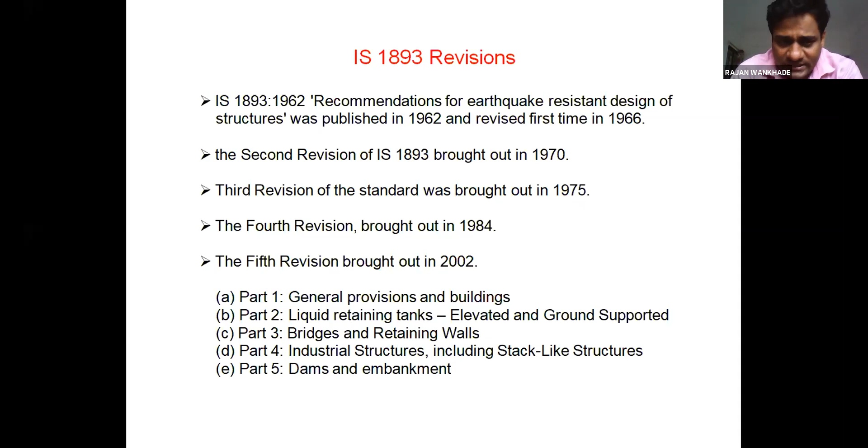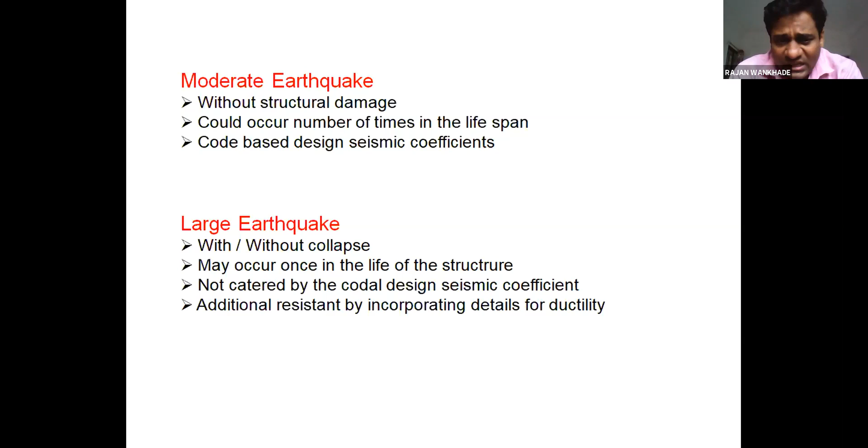But if it is a large earthquake, it can lead to, with or without collapse, major damage to the structure, and this can occur once in the lifetime of the structure, like the Bhuj earthquake and Killari earthquake. Those are examples of large earthquakes.

When we design buildings, we generally go for structures with a simpler plan, and this simpler plan performs better. But if we have an irregular type of building, there is geometric irregularity, stiffness irregularity, mass irregularity, and vertical irregularity. These are different types of irregularity. If we have an irregular structure with these different types of irregularity, it cannot perform better during the seismic occurrence of an earthquake, hence we generally go for the simpler plan for better performance.

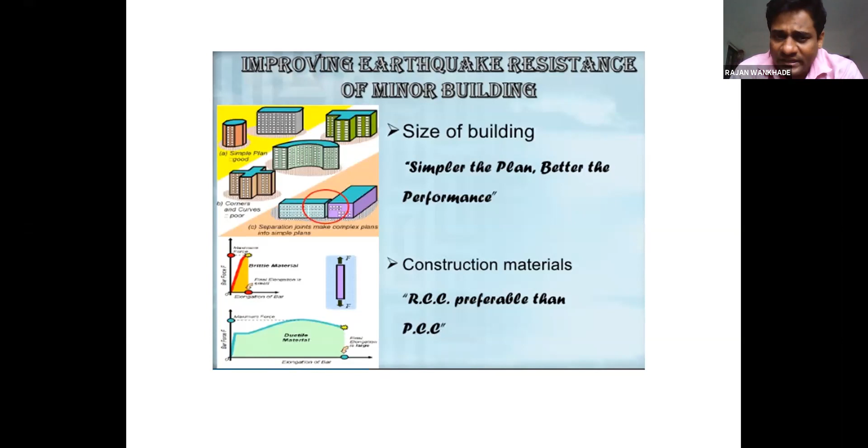We have construction materials, as I told, RCC and PCC. In RCC, we use structural steel as the ductile material, and this ductile material shall be given specific guidelines for designing of the reinforcement in ductile detailing.

We go for strong column and weak beam, because if the beams are weak but the column is strong, the column takes the load, and the joint should be sufficient to take the horizontal seismic load. That is the main approach of the strong column weak beam theory.

Horizontal bands and lintels are to be provided at doors and windows. If these are not provided, this can lead to damage during an earthquake, and the best example of this is the Latur earthquake incident.

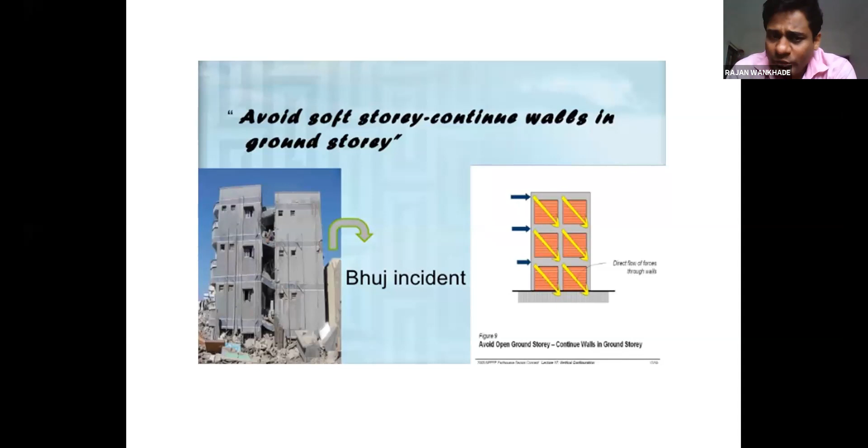The Bhuj earthquake of 2001 also showed us the presence of soft story and weak story conditions. There are specific definitions given for soft story and weak story, and due to their availability, buildings become unstable because they have less stiffness. Hence the IS code gives provisions for soft story and weak story to ensure higher stiffness. So improving the stiffness of this weak story is one approach.

Shear walls can also be provided. The shear wall and its positioning can lead to improving the stiffness of the structure in the lateral dimension.

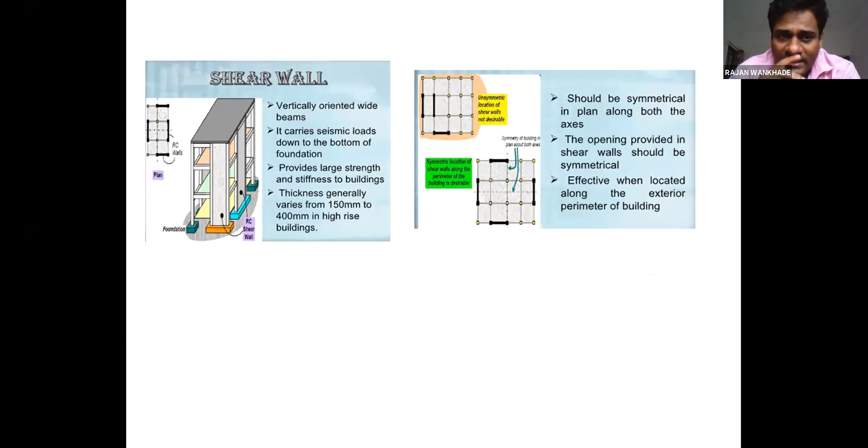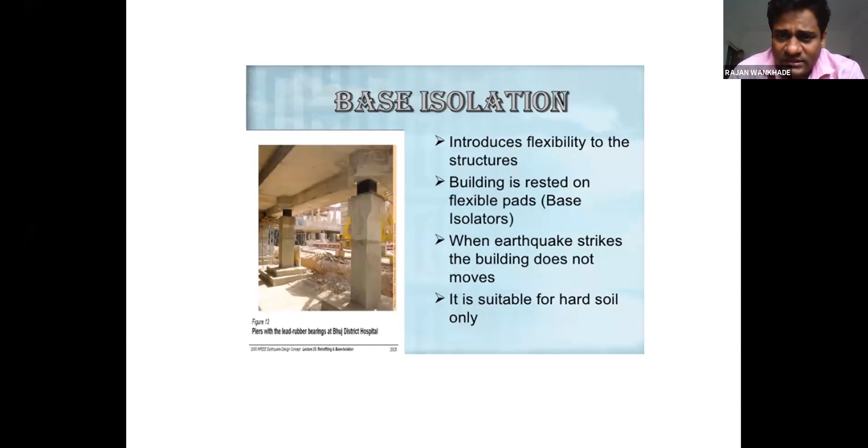Base isolation is one of the techniques used to absorb shocks due to horizontal motion of the structure. Ground vibration is counterbalanced by the base isolation.

We can also use dampers. Different dampers exist: tuned mass dampers, viscoelastic dampers, friction dampers, yielding dampers. These dampers can be made of steel, lead, or rubber bearing. There are various types of dampers, and they act as shock absorbers. If there is horizontal shaking, the joint movements and joint forces can be absorbed by these dampers. If the damper fails, we don't lose much, but if the structure fails, we can have loss of humanity and loss of structures. So we provide this type of damper. When an earthquake occurs, these dampers—for example, if we are using a lead damper—break and absorb the shock vibrations.

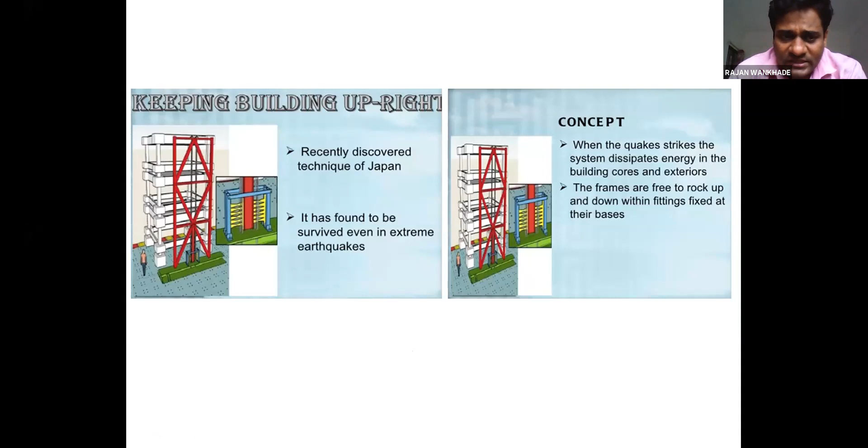An upright system is also one of the systems which keeps the building upright. It also acts as a shock absorber, dissipating energy, and hence this system is used in various techniques as a shock absorber.

Now we design the member as a flexural member or shear member. The member which takes flexural forces, that is bending moment, is called a flexural member. In general design practice, our beam is the flexural member because the beam is designed for bending.

If it is a cantilever beam, the bending moment or fixed end moment occurs at the support. If it is a simply supported beam, higher bending moment occurs at the center. If it is a fixed or continuous beam, bending moments occur at the center of the span, and at the support there occur fixed end moments or support moments. For these moments we use IS 456-2000.

In IS 456-2000, the coefficients of bending moments are given, and from that we find the steel reinforcement and design the beam as a flexural member. We also design it for shear.

For designing the flexural member, that is the beam, we have specific criteria for width and depth of the beam. We generally don't go for less than 200 mm width of the beam. We generally provide 230 mm or 300 mm. In some cases only 300 mm width is specified, like for water tanks and similar structures.

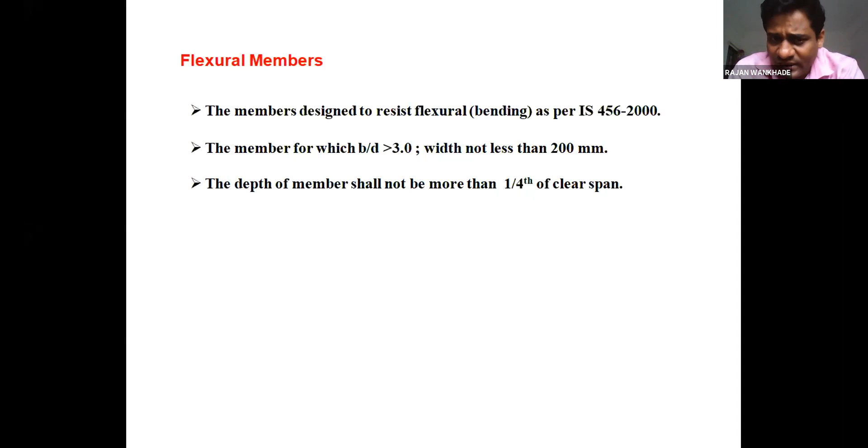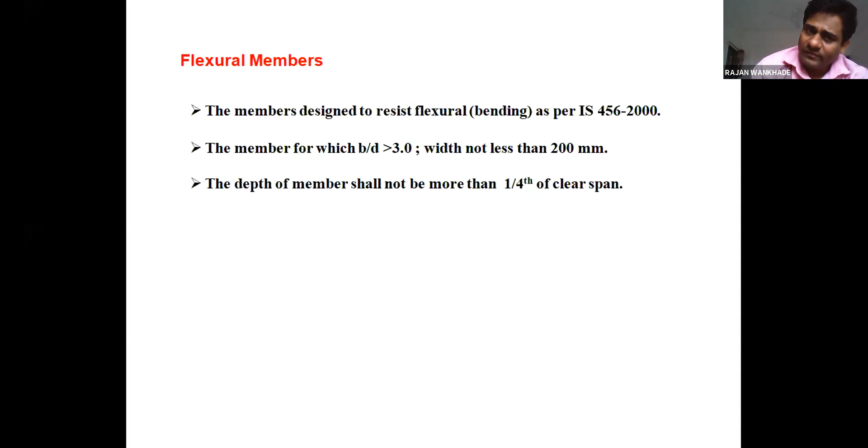Now the depth of the beam is restricted by the criteria that B by D ratio should be greater than 3; that is the depth criteria. The depth criteria also depends on the diameter of the reinforcement to be used—that is also one of the criteria incorporated. The depth of the member shall not be more than 1/4 of the span, because it may lead to a deep beam. That is the difference for flexural members.

We have the longitudinal reinforcement. We can provide the main reinforcement and nominal steel, but the definition and arrangement of this main longitudinal reinforcement is governed by the IS code, and specific criteria should be followed for providing the reinforcement. A minimum of 2 bars and a maximum number of bars can be provided, arranged in layers also. We can provide bars in 2 or 3 layers if the depth of the beam is large, and the development length should be proper for this longitudinal reinforcement.

The top and bottom reinforcement shall be considered as at least 2 bars, since we cannot go for only 1 bar. We have a symmetric structure, and at the top also nominal 2 bars shall be provided.

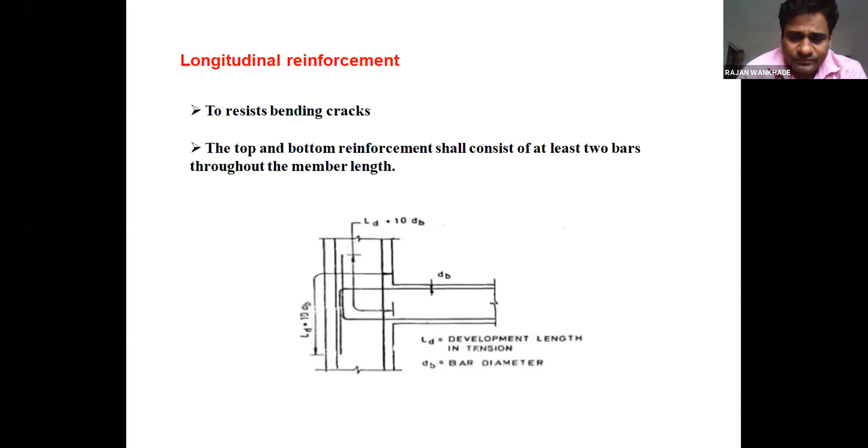Now for shear reinforcement, that is the transverse reinforcement, it is to be provided by specified criteria. The minimum spacing between the reinforcement shall be 100 mm, and that spacing should not be exceeded at the supports or at places where confinement of the reinforcement is required. This specific criteria is given in IS 13920, that the spacing between stirrups shall not exceed 100 mm.

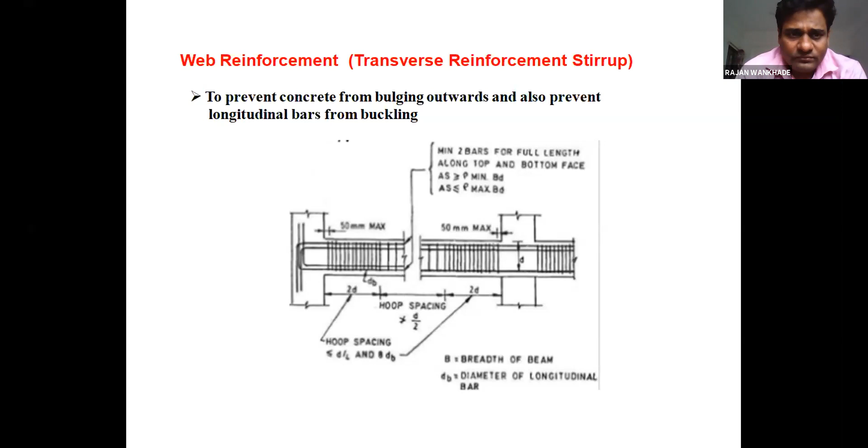For the column also, at the point of the junction, there is a beam and column junction. The confinement of the reinforcement shall be provided at the column and also at the junction of the beam, both places. This should not be greater than 100 mm. At the center of the column, the reinforcement should have confinement.

The stirrup shall be a 2-leg stirrup; 4-leg and different leg stirrups can be used as specified, or as given by the depth of the column. If the depth of the column is higher, greater depth, we can have this type of arrangement for the stirrups.

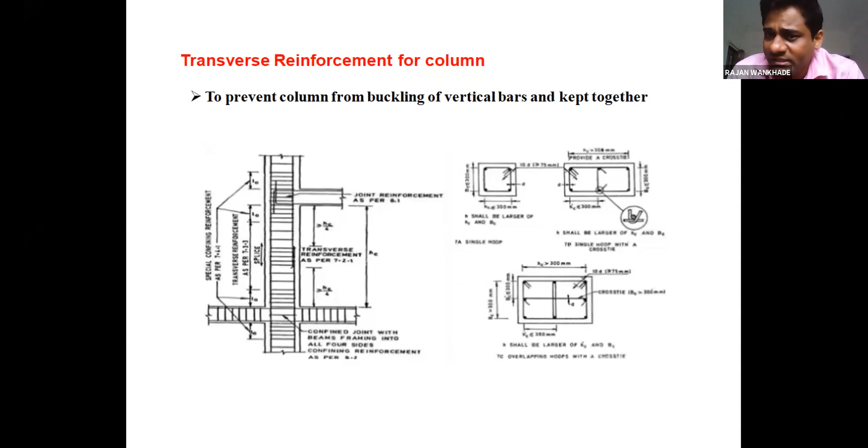Some important provisions are made in IS 1893 and IS 13920. When we have the beam width and beam depth, as per the latest IS code, if the diameter of the bar is given by dB, then we can go for 20 dB dimension of the column, or 300 mm. So minimum column width should be greater than or equal to 300 mm, or it should be 20 times the diameter of the main reinforcement. If the diameter of the main reinforcement is 20 mm, then 20 into 20 should be the column width. If the diameter of the bar is 25 mm, then 25 into 20, that is 500 mm, should be the dimension of the column. That is the criteria. As per IS 13920 also, bent up bars, inclined links and concrete RC should be governed by the specific criteria.

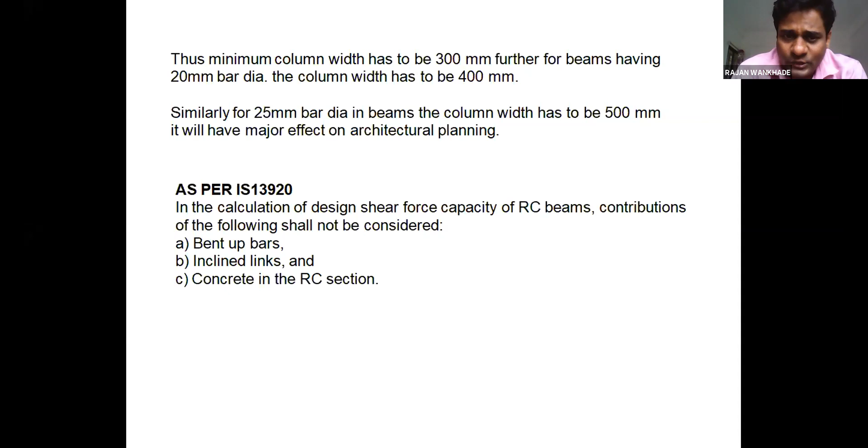Now, as per IS 1893:2016, these structures are designed as per the standards and are expected to sustain the damage. Smaller damage can be sustained by this, so that it can be recovered or we can repair the structure. The provisions of these standards are intended for earthquake resistant design of normal structures.

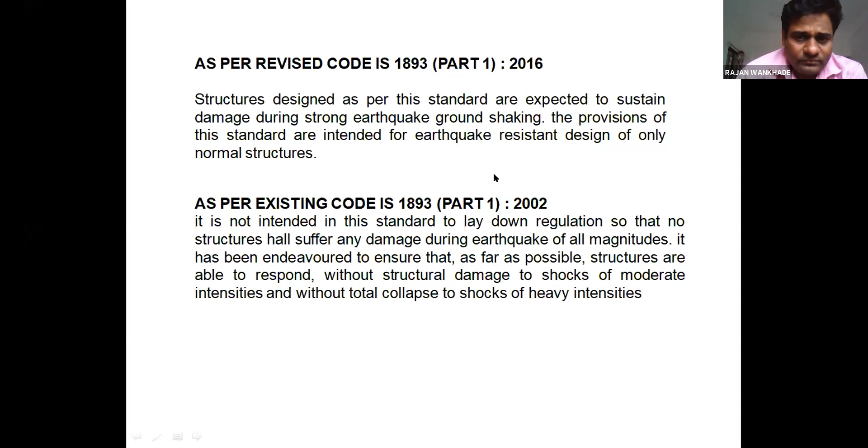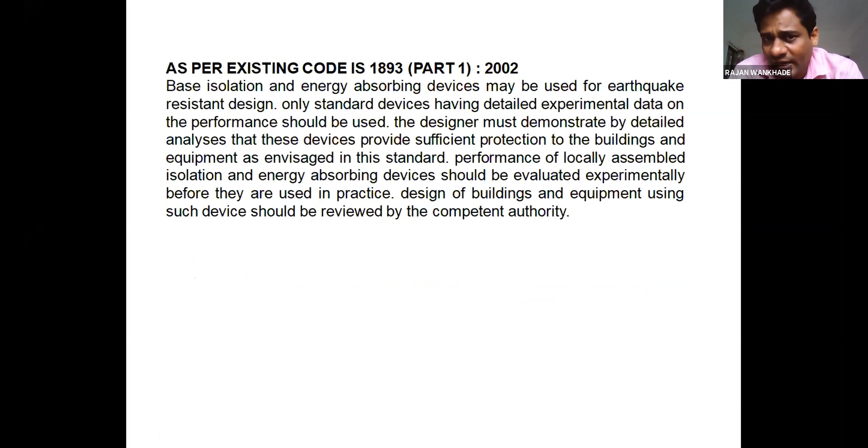Base isolation and energy absorbing devices may be used for earthquake resistant design, and we are not given the specific codal provision criteria, but in 2016 special importance is given to base isolation and energy absorbing devices, that is dampers and base isolation.

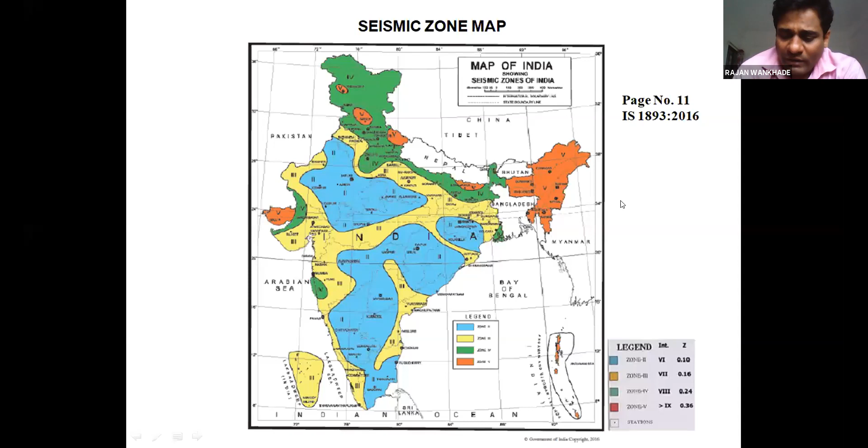Now this zone coefficient, that is Z, the value of Z as given in the IS code. Depending on these values of Z, we have the SA by G ratio, we have R, and we have I. From this we have the formula for the design horizontal seismic coefficient. What is the use of this design horizontal seismic coefficient? This formula is used to find the base shear.

Base shear and the horizontal forces at different levels of the building frames can be found from the total seismic weight of the building. Total seismic weight of the building can be found with the addition of the weight at each floor. If H is the height of the building, we can specify HI, that is the height at each level, H1, H2, H3, H4, H5, by the height of the building. AH multiplied with W will give the total seismic force, and from that we can find out VB static and VB dynamic.

VB static is the forces in the static case, and VB dynamic is the forces in the dynamic case. Now AH is given by Z by 2 into SA by G upon R upon I. Simplified, we can write Z by 2 into I by R into SA upon G. Here Z is the zone factor given by the IS code, 0.16, 0.24, likewise for different zones, and it is given by these zones, that is for Z. Now we have the SA by G ratio.

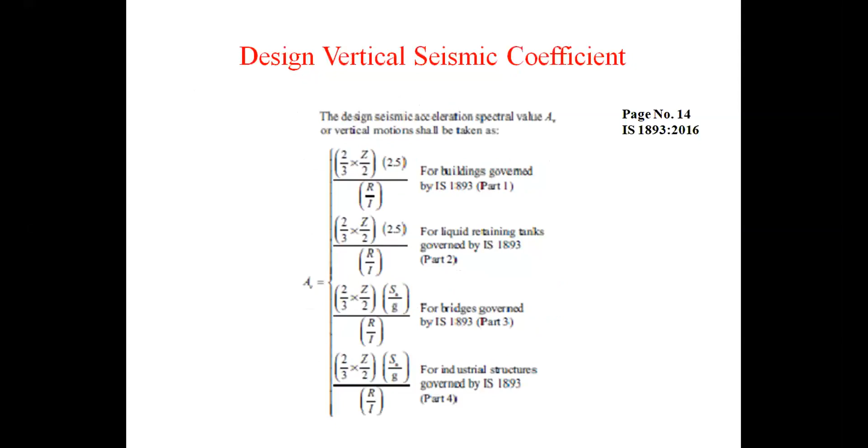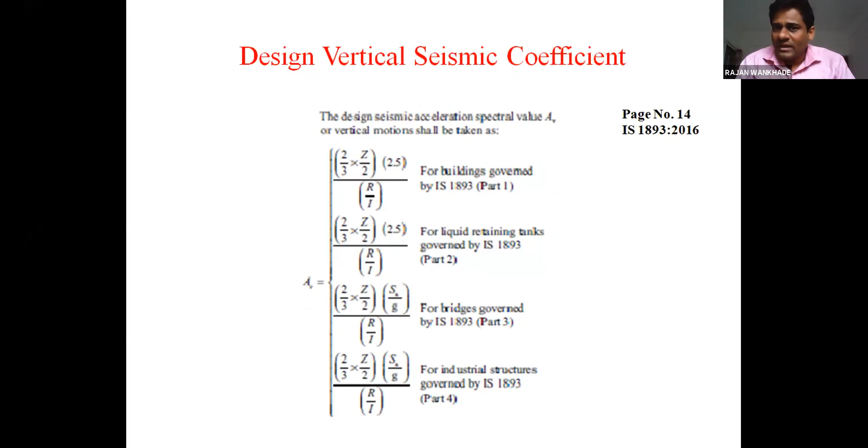In the previous IS code, vertical seismic coefficient was not given that importance, and hence in IS 2016, vertical seismic coefficient is also given as a specific formula, that is given by AV, A and V. V for the vertical seismic coefficient, given by 2 by 3 Z by 2 into 2.5 R upon I. So this formula which is given for horizontal seismic coefficient is slightly modified for the vertical coefficient, and this depends on the buildings, liquid retaining tanks, bridges, and industrial structures.

So if there is a liquid retaining tank, instead of using this formula, you will have to use this modified formula. That is for the vertical seismic coefficient.

SA by G ratio depends on the time period. If T lies between 0 to 0.4 second, if T is between 0.4 to 4 second, if T is greater than 4 second, and also the SA by G ratio depends on time as well as the soil condition.

If it is hard soil, rock soil, if it is medium soil, stiff soil, if it is soft soil, then your SA by G will be little different. And for vertical and horizontal seismic, you will have to find out the SA by G ratio from page number 9 of IS 1893-2016.

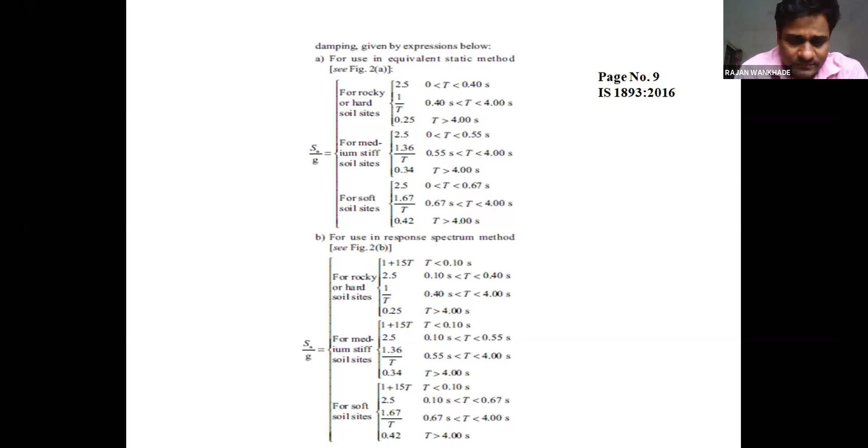Now, how to find out the time period? In the previous IS code, we were bound to use only one formula, to go for this formula.

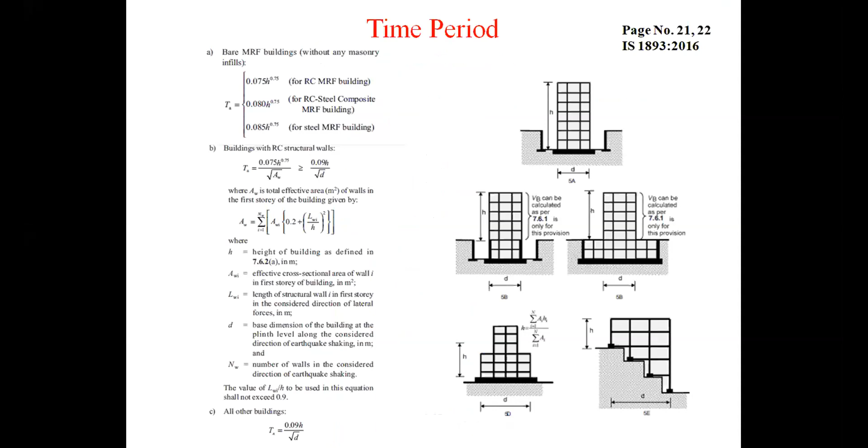TA equals to 0.075 h to the power 0.75 upon under AW, and that should be greater than or equal to 0.09 h upon under D. That is the basic formula. This TA is introduced in the latest IS code.

This is the incorporation of this formula, and this AW, that is the effective area of the shear wall, is given by this formula: summation i equals 1 to N, AWI into 0.2 plus LW upon H whole square, where H is the height of the building, AWI is the effective cross-sectional area of the wall, length, base dimension, and number of walls of the shear wall.

And if there is a bare moment resistant frame without shear wall, the formula becomes T equals 0.075 h to the power 0.75 for RC moment resistant frame.

If it is a steel composite frame, that formula will be replaced by T equals 0.080 h to the power 0.75. And if it is only a steel moment resistant building without any composite, the formula becomes 0.085 h to the power 0.75.

So this is the incorporation of this time period formula, and for different structures we can use different formulas for the TA. But the limit of this formula is it should not be less than 0.09 h upon under root D. That is the basic formula.

Now we have some irregularities of the building and how to take the base effective dimension, as given by these figures. If it is rectangular, D is the overall width of this structure, but if it has unsymmetric geometry, the base dimension is different from the top dimension, then D shall be the effective D. So this figure shows the effective D, which is taking part in the seismic forces.

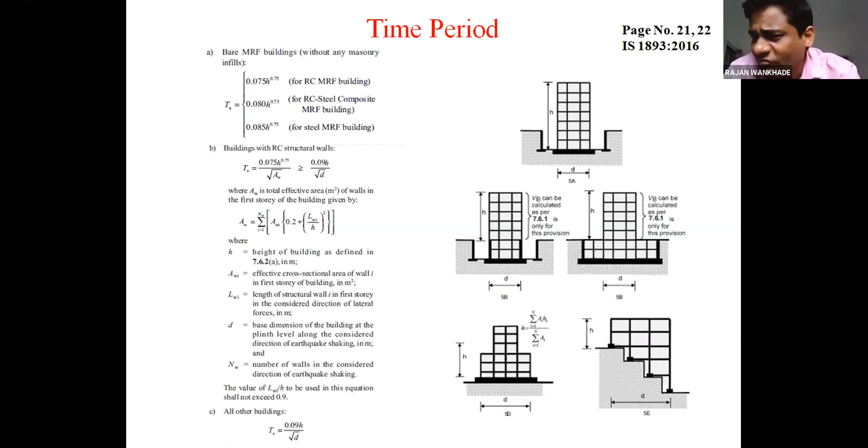If it is a set-back, step-type building vertical irregularity, then D, that dimension, will be from the first column to the last column.

So the figure shows some irregular types of buildings. The building can have plan irregularity, like T-shaped building, L-shaped building. These are examples of plan irregularity.

We have stiffness and mass irregularity. If the building is having a soft story, if it is having a weak story, or if it is having different stiffness at various levels, then this irregularity is termed as stiffness and mass irregularity. Some malls are examples of this. In some malls, the middle portion can be larger than the top and bottom portion, so it is termed as mass and stiffness irregularity because stiffness and mass are different at different levels. Some malls and specific hospitals are examples of this mass and stiffness irregularity.

We have vertical irregularity. Sloping ground is available in the Himalaya region, so in those cases, if houses are constructed on sloping ground, it will be termed as vertical irregularity.

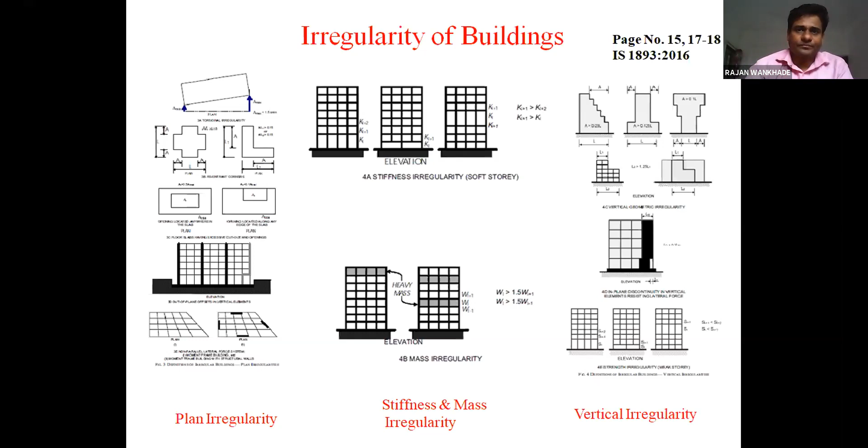Now we have the equivalent static analysis, and in equivalent static analysis we find QI. We have seen the formula for AH, that is Z by 2, I by R, Sa by G, and this AH is multiplied into VB, that is the design lateral force, given by VB equals AH into W. From this VB we find QI, the base shear, that is the lateral force. QI is termed as VB into WI HI square upon summation of WI HI square, where I represents the level.

For example, if it is a 4-story building, I will be 1, 2, 3, 4, that is level 1, level 2, level 3, level 4. The building should be designed for at least the minimum design lateral force as given by clause 7.2.2, and for this various percentages are given. If the building height is less than or equal to 120 meters, for different zones this factor should be 0.7, 1.1, 1.6, 2.4. So this is the limit for these factors.

So likewise VB static, we have VB dynamic. If we go for VB dynamic, the formula given by summation WHI upon summation WHI square is converted into PK, that is the modal participation factor, which becomes summation WI phi I upon summation WI phi I square, where phi represents the mode shape of the first mode, second mode, third mode, fourth mode, and so on. We consider those modes which have maximum contribution.

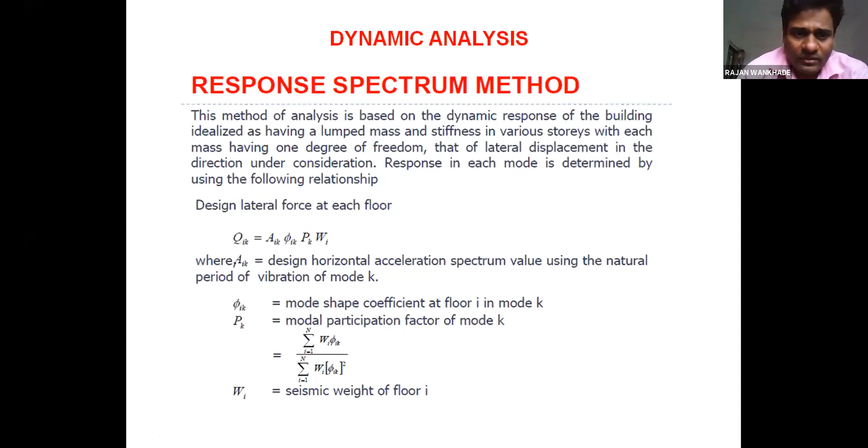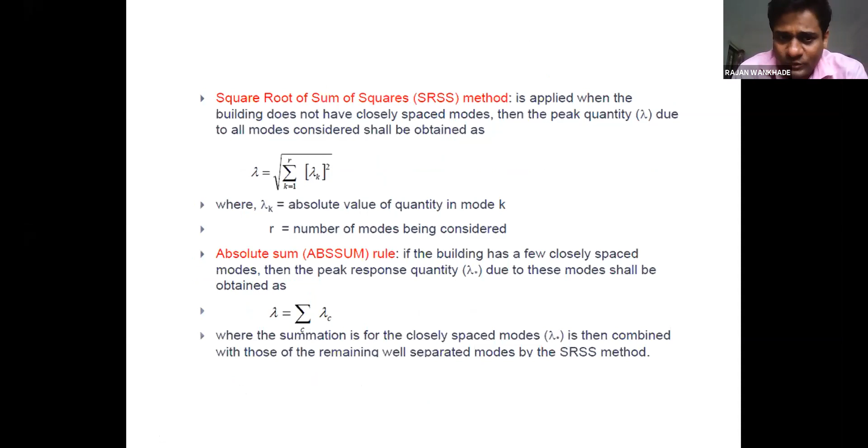Hence we have two methods, SRSS and ABSSUM method, for finding out the value of lambda. SRSS is the square root of sum of the squares method: lambda equals the square root of the sum of squares of lambda k for different modes.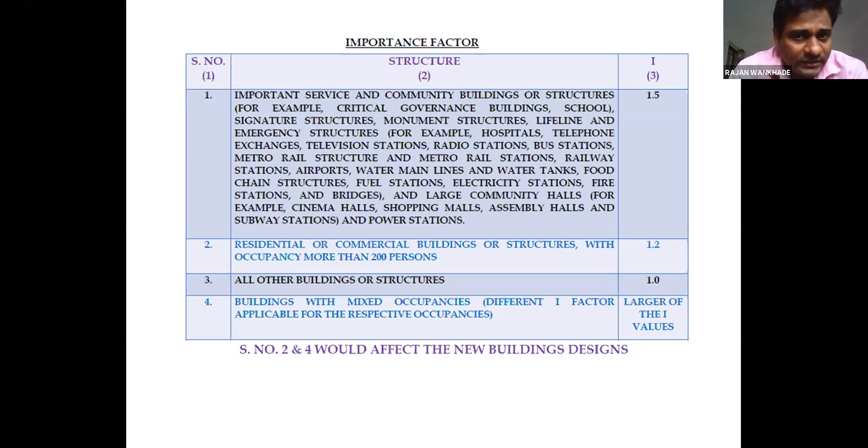Now, importance factor. Importance factors which were having only two values in the previous IS code, that is 1.5 and 1, are revised in IS 2016 as 1.5, 1.2, and 1, with the larger of these values used. Buildings that are important service community structures, like government buildings, schools, monument structures, have a higher importance factor of 1.5. Normal buildings, residential, commercial buildings that are not that important, but still have specified governance criteria and occupancy more than 200, use the 1.2 importance factor. In the previous IS code, instead of 1.2, it was only 1; now it is modified as 1.2. For all other normal regular buildings, we use the importance factor as 1.

So previously the IS code had the 1.5 and 1 criteria, which is modified in the 2016 IS code as 1.5, 1.2, 1. So these are the different values which are incorporated.

Now we have the response reduction factor. It is given by the stiffness criteria, and stiffness criteria depends on ordinary moment resisting frame, special moment resisting frame, composite frames, and frames having brick wall or infill wall. All this depends on stiffness, and hence for stiffness we have the response reduction factor. Response reduction factor for OMRF is 3, SMRF is 5. In addition, for buildings with ordinary RC structural walls, a factor of 3 is introduced, and 2.5 is introduced for structural wall systems. This is the addition of clause 7.2.6 in the new IS code.

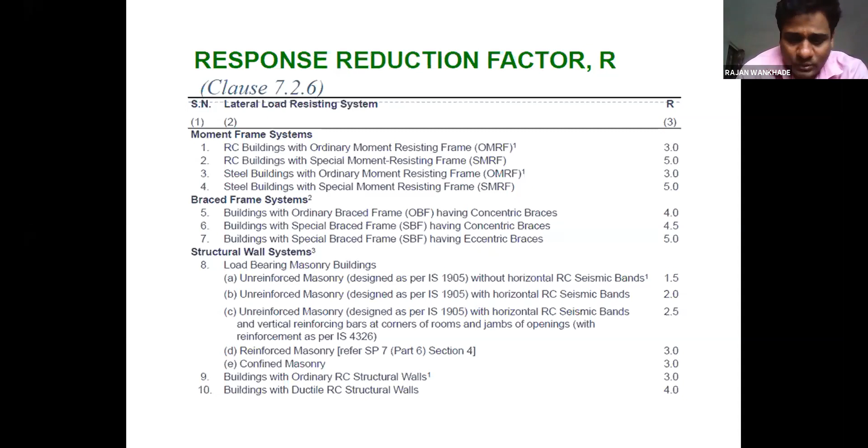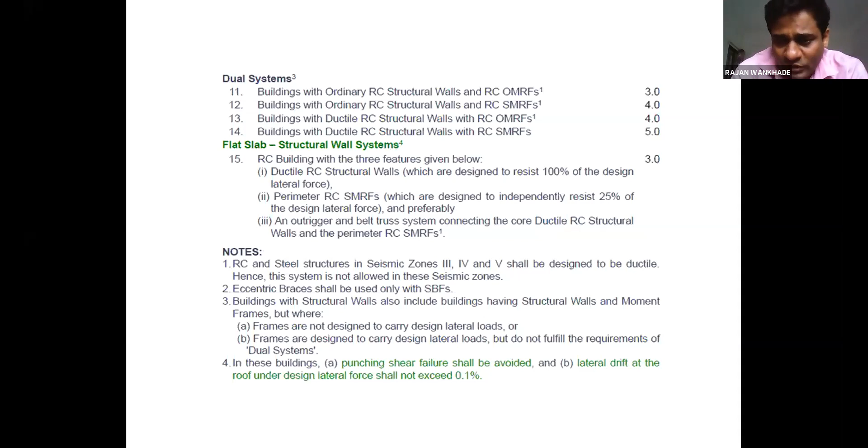Another new parameter is introduced: as per the previous IS code 1893:2002, the time period was 4 seconds, and it is now extended to 6 seconds. So the natural period, T, in seconds, is elongated to 6 seconds in the revised IS code. This is the spectra given for different types of soil: type 1, type 2, that is soft, medium, and rock.

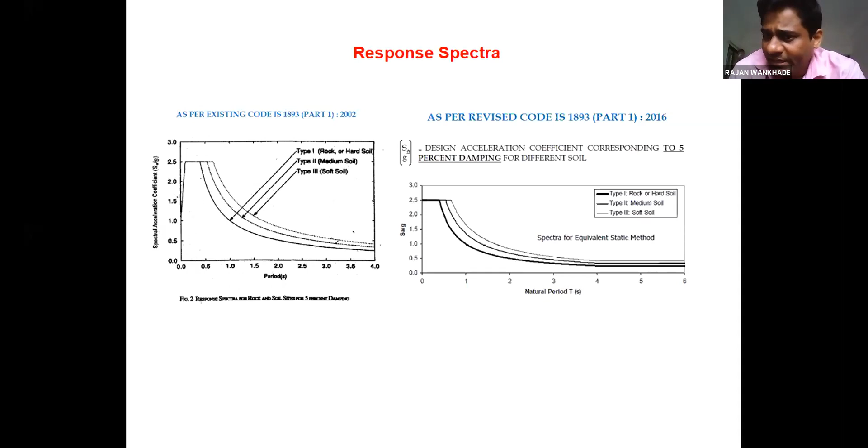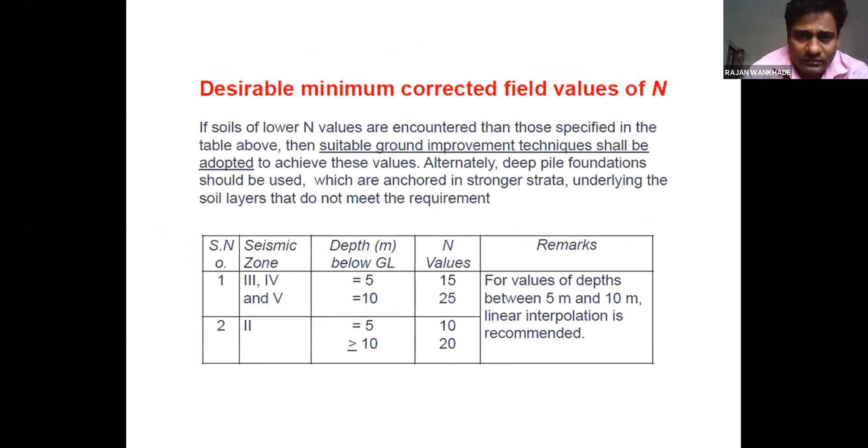Now, the percentage increase in allowable bearing capacity of the soil: if it is rock soil, you can increase the percentage allowable, that is 50%, 25%, and 0% for soft soil. So for soft soil, no percentage increase in bearing capacity or bearing pressure of the soil is allowed.

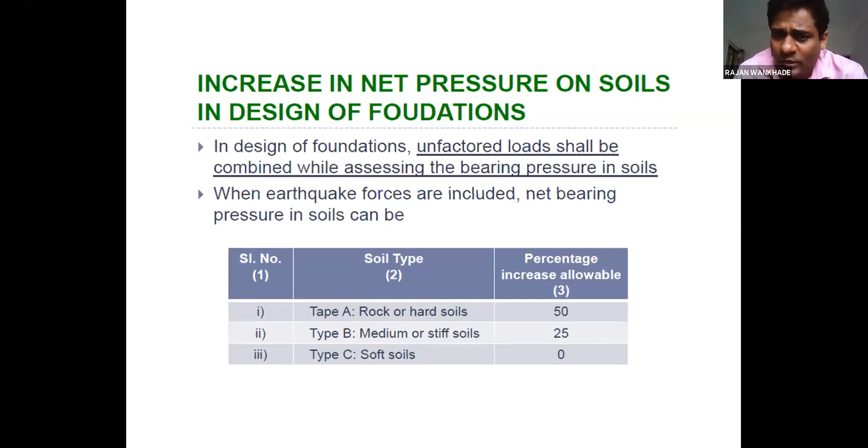Codal design philosophy: we need the ductile behavior of the structure, and ductile behavior can be obtained by having the specified confinement of reinforcement. We avoid the brittle behavior of the structure, hence the equivalent ductile behavior factor with equal elastic and inelastic deformation. So we want only elastic and inelastic deformation, but we don't want brittle failure.

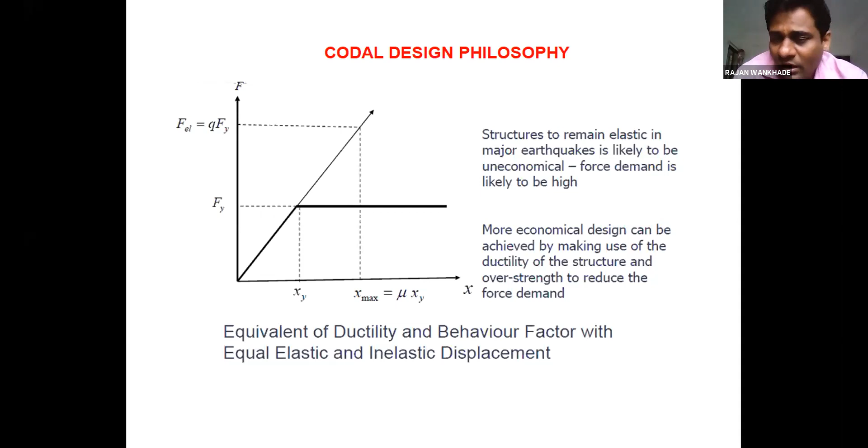Now we have different load combinations for earthquake resistant design. We take 1.5 times the dead load, 1.5 times the live load, and when we add the earthquake load, we take 1.2 times. So the load combination is 1.5 dead load plus live load, plus 1.2 times dead load, live load, and earthquake load.

These combinations are specified for the design horizontal earthquake loads, given as ELX plus or minus ELY. If earthquake is taken in the X direction, then in the second direction we take 0.3, that is 30%. If we take earthquake in the Y direction, then we take 30% in the X direction. So ELX plus or minus 0.3 ELY, or ELY plus or minus 0.3 ELX. If 0.3 is in the Y direction, the major direction is X; if 0.3 is in the X direction, the major direction is Y.

So for this we have these combinations: 1.5 dead load plus live load for normal loading, 1.2 times dead load plus live load plus or minus earthquake in the X direction, 1.2 dead load plus live load plus or minus earthquake in the Y direction, and 0.3 is added for the orthogonal direction.

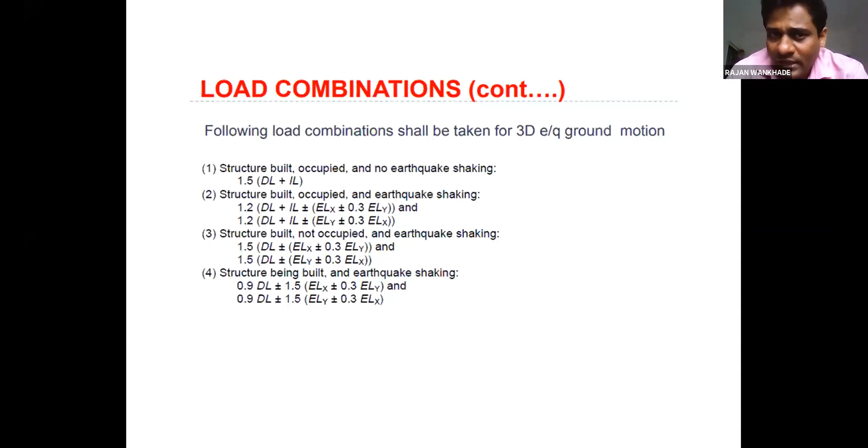And 1.5 dead load, live load, earthquake load, 0.9 dead load plus or minus 1.5 ELX in the major direction, and 0.9 dead load plus or minus 1.5 ELY in the major direction. These are the load combinations, and taking all combinations leads to an envelope of loads, from which we pick the maximum combination giving maximum force. For that maximum force we find the bending moment and shear force, and design the structure.

Now, likewise horizontal seismic coefficient and horizontal effect, we also consider the vertical effect. But there are some conditions for considering vertical effect. If it is a normal structure not in a highly earthquake prone region, we shall not go for vertical earthquake effects because it will not contribute much, and considering it would be uneconomical. So to avoid this uneconomical condition, we have guidelines for the vertical earthquake effect.

For considering vertical effects: if the structure is located in seismic zone 4 or 5, go for vertical earthquake effects; if located in zone 2 or 3, don't go for vertical effect. If the structure has vertical irregularity or plan irregularity, you can consider vertical earthquake effects. You should also consider the vertical earthquake effect if the structure is on soft soil, because it will lead to unequal settlement.

Why for bridges should we consider vertical effect? Because in a bridge, the span between the two columns is very large, and hence for such large span, unequal settlement can occur, and hence vertical earthquake effect shall be considered.

Structures having longer spans, for example bridges, overhang structural cantilevers, or subsystems, should consider vertical earthquake effect because this will create differential moments.

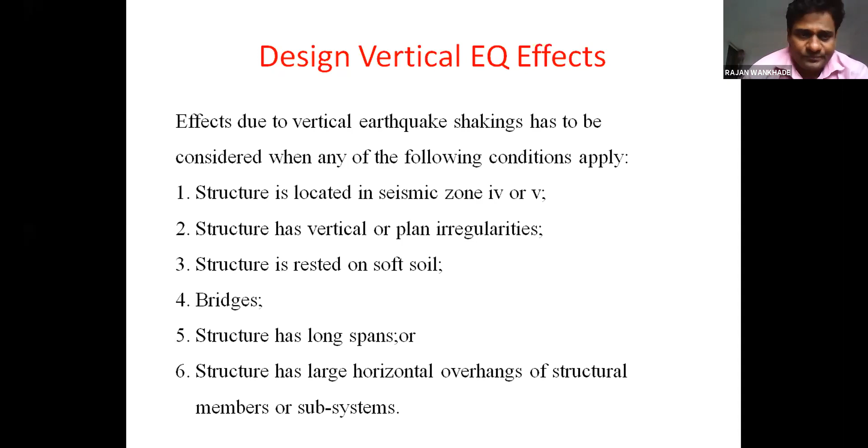Combination of these earthquake effects for 3D ground shaking can also be considered. For 3D ground shaking, we have ELX, ELY, and ELZ. If major direction is taken as ELX, that is X direction, 0.3 plus 0.3 means 30% is Y direction and 30% is Z direction shall be considered. If major direction is Y, then 30% is Z and 30% is X. If the major direction is Z, then X and Y directions shall take 30% of the earthquake force.

Other combinations are given in terms of 1.2 dead load, IL meaning imposed load, and ELX, ELY, ELZ - these are the different combinations. Likewise, 1.2 times, 1.5 times, and 0.9 times - these are the different load combinations.

Now equivalent 3D load shall be taken as under root of ELX square plus ELY square plus ELZ square. That is the root of this addition.

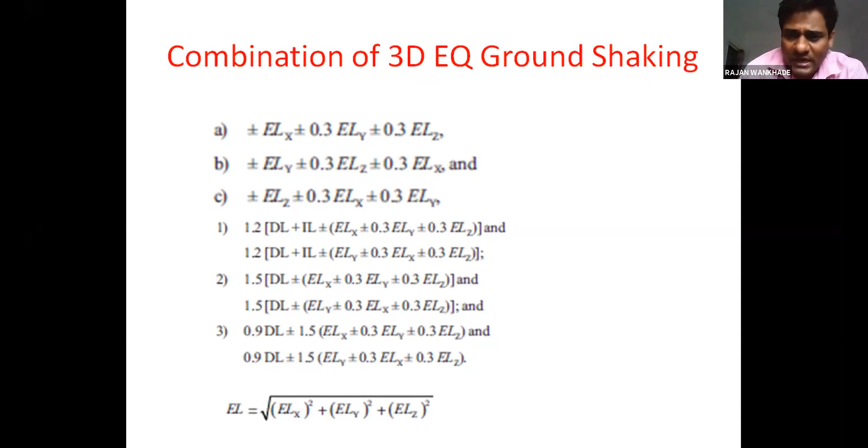Section properties have specific criteria. In RC and masonry structures, 70% of I gross is taken. Now how to calculate I gross? If it is rectangular, I section, or channel section, that is the logic for this. For column, 70%, and for beam, 35% of the I gross shall be taken. These are the stiffness criteria.

Soil interaction is related to the foundation, and for foundation we have different soil types, and this classification of soil - type A, type B, type C - depends on the value of N, that is the corrected value of N for different zones.

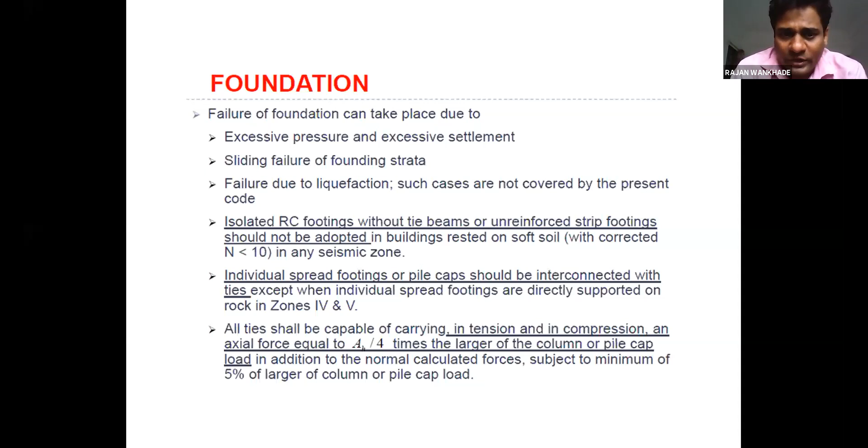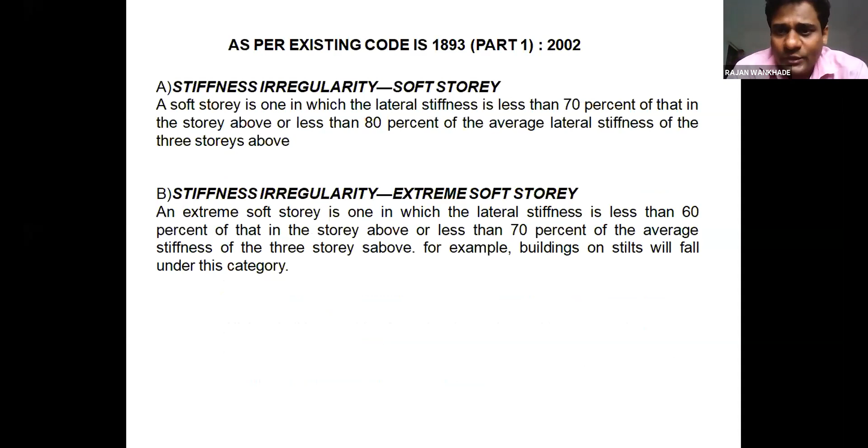We have specific definitions for the soft story and the weak story. As per the previous IS code, the story having lateral stiffness less than 70% of the above story, or less than 80% of the average of the three stories above, can be termed as the soft story. The stiffness irregularity definition for soft story, as per the new code, has changed a little. Likewise, for the weak story, the definition has also changed a little.

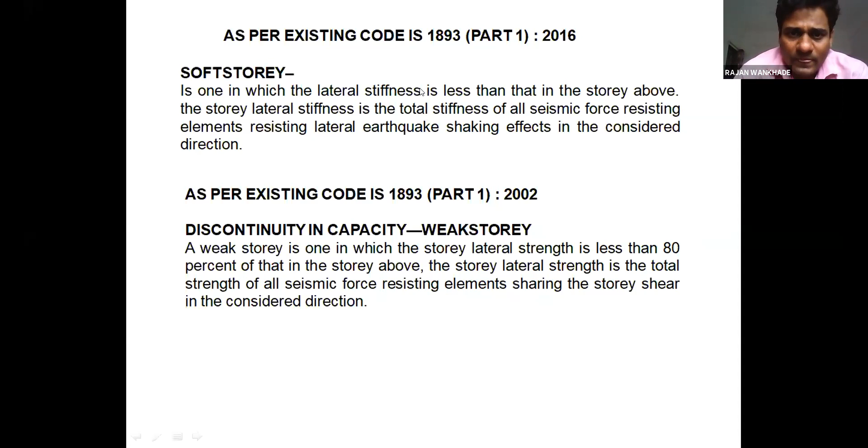So these are the definitions of these stories.

The minimum design earthquake horizontal lateral force for which a building shall be designed is given in percentage for different zones as 0.7%, 1.1%, 1.6%, 2.4%, as we have already seen, or we can calculate it from the AH values.

Torsional effect shall be taken into consideration for designing these forces, and the value of eccentricity is governed by the formula EDI equals 1.5 times ESI plus 0.05 BI. These design eccentricities shall be taken into consideration.

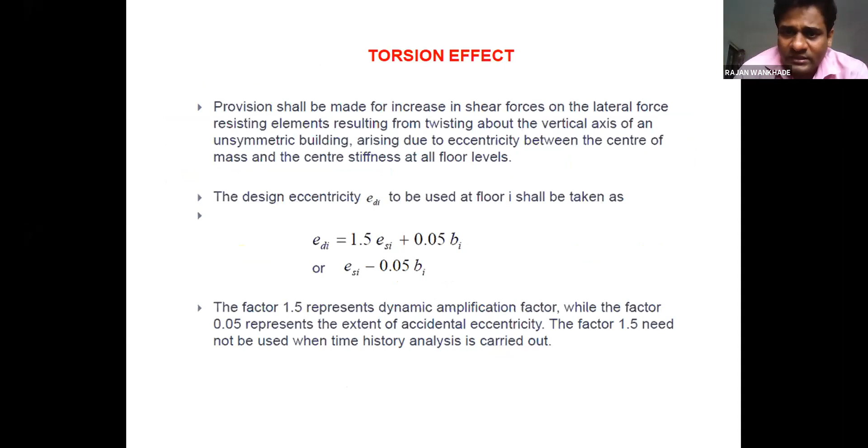Now for monolithic construction, RC construction, precast, pre-stress, and flat type structures, we have the criteria to consider in IS 13920/2016. So in conjunction with IS 1893, we'll have to refer to IS 13920 for detailed design and specific design for earthquake forces, because some clauses of IS 1893 are better explained by IS 13920.

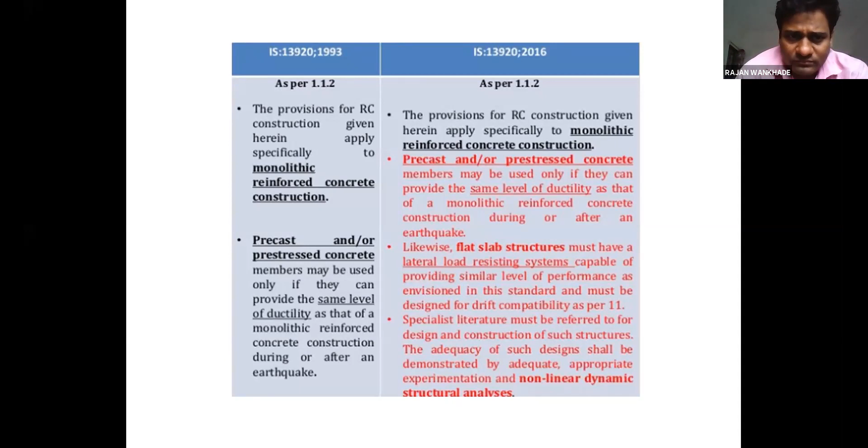For the RC walls, we have seen the formula for TA, that is the time period, which is governed by AW, as we have seen.

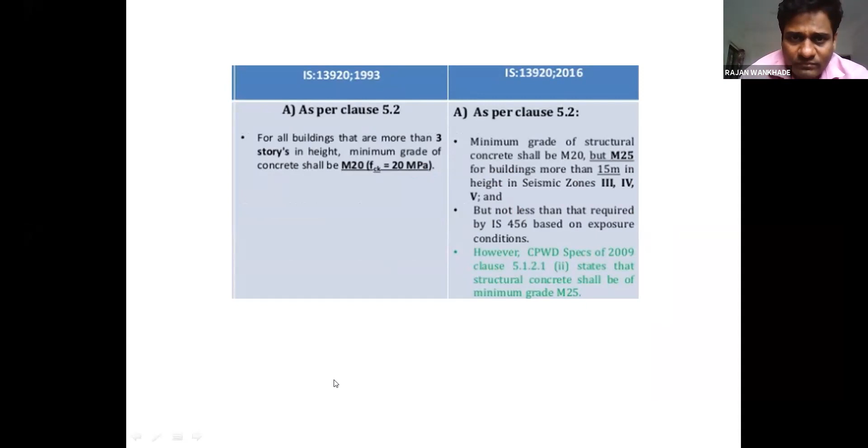So we have this 0.1 FCK factor for axial stress. Now it is changed to 0.08 FCK.

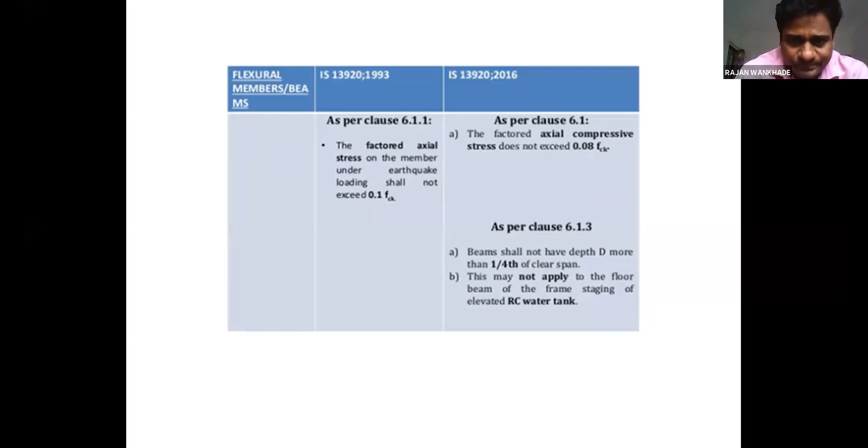Confinement of the reinforcement and the detailing, the beam-column junction, that is what we have seen.

Minimum 0.24 under root FCK upon FY is the tension reinforcement, that is the minimum steel required. The minimum diameter of the bar shall be 12 mm, that is for the main reinforcement.

Now we have specific provisions. For the stirrup, you can use 8 mm bar. If you have a beam, it shall not go below 12 mm bar. If you have a column, we need to take 16 mm bars and more than that only.

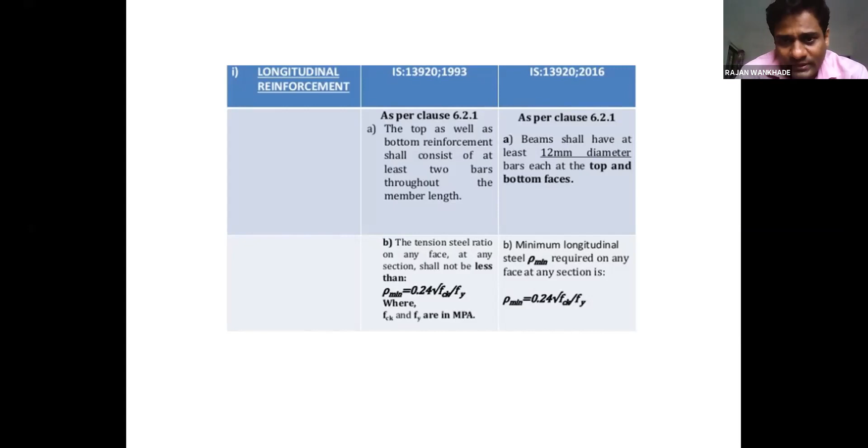Lap length, spacing between the lap and the stirrup shall be less than 150 mm. And not more than 50% of the area of the steel bars on either the top or bottom face shall be spliced at any one section.

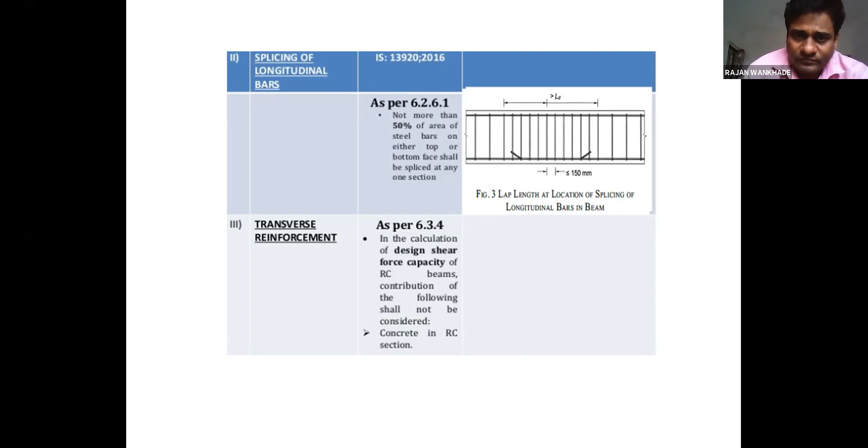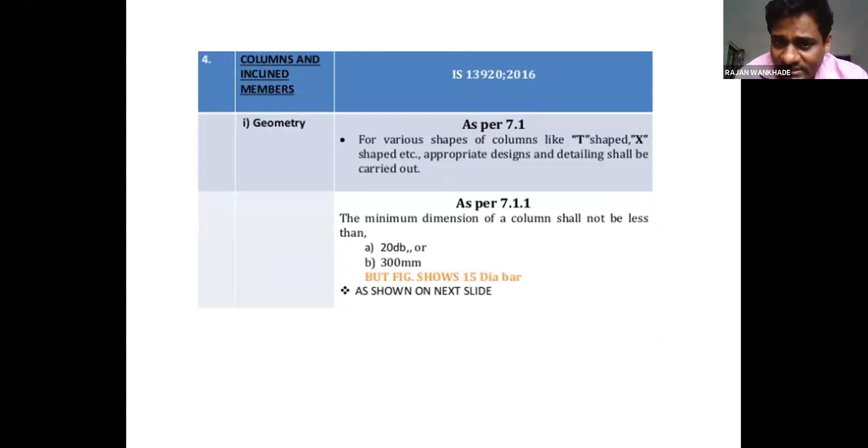We have seen this 20 times dB, that is minimum dimension of the column. dB is the diameter of the bar, or it shall not be less than 300 mm. This we have seen.

So the criteria for the lap length, 50% of the bar shall be spliced at one section, but not more than 50% shall be spliced. And that spacing for the splices shall be 150 mm, it shall not be greater than 150 mm.

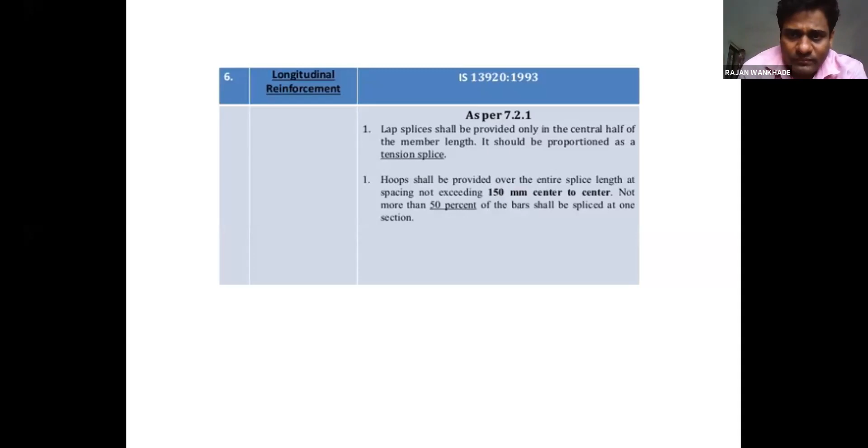So what are the revised provisions incorporated in the IS code? First, we have seen the time period formula. For the shear wall, the time period formula is different, 0.09 h upon root d. That was for the normal building, but if you are using a shear wall, the formula is a little different.

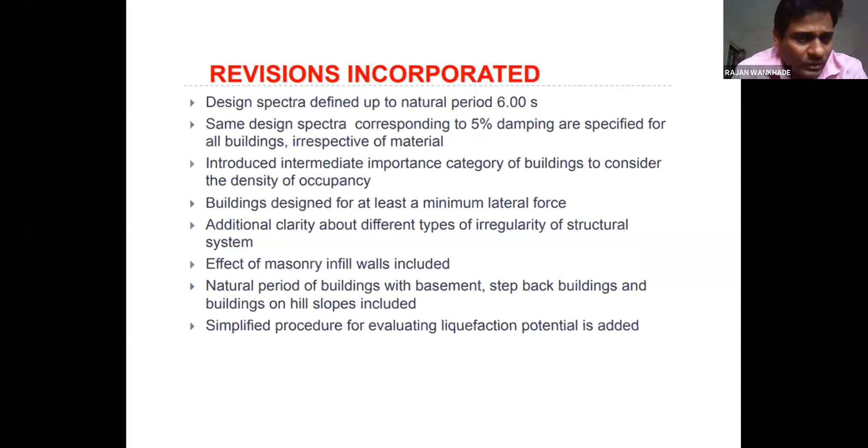Then importance factors of 1.5 and 1.2 are given. Response reduction factor depending on stiffness criteria, 5, 3, 4, 3.5, those are given. Design spectra, which was up to 4 seconds in the previous IS code, is extended to 6 second time period.

Now for steel buildings, we can use the IS code for 5% damping. Generally we take 3% damping, but 5% damping is also incorporated for this material, so we can use this for steel also.

The load combinations and the vertical seismic coefficient is also incorporated. We have the formula for AH, the horizontal seismic coefficient, but AV is also incorporated for different types of structures like buildings, water tanks, and retaining walls. So this is the addition to the guidelines in the IS code.

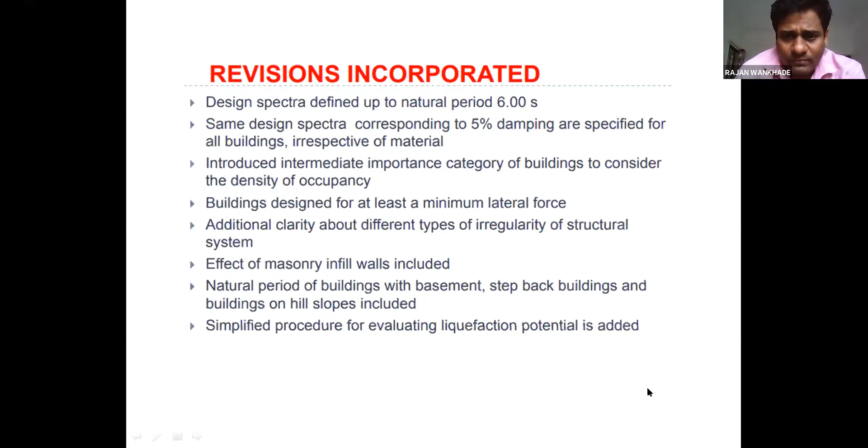Critical zones in the IS code shall be taken for confinement of the reinforcement. For beams up to a length of 2D, large negative moments and shears occur. Moment reversal is possible, then we go for plastic hinge formation, which requires proper confinement of the reinforcement.

Beam column joint, where reversal of the local shear causes diagonal cracking. Then the development length shall be properly specified.

For detailing of the beam, general specifications are given. Minimum compression steel shall be greater than 0.5% of the AST, that is 0.5% of the main steel. Minimum 2 bars for the length of the beam at the top and bottom, that is known.

If it is a singly reinforced beam, nominal reinforcement shall be provided at the top, that is 10 mm dia bars, but main steel shall not be less than 12 mm dia bars. Full bond length, that is LD plus 10 times diameter of bar, shall be provided.

Splice near the quarter span points, only 50%, not more than 50% shall be provided for the splices. Lap length LD, confinement within the stirrup spaced at 150 mm, it shall not be greater than 150 mm. Web width greater than 200 mm given by the IS code.

Longitudinal reinforcement criteria given by the IS code, 0.24 under root FCK upon FY. Transverse reinforcement, spacing of the stirrup at the ends by 2D, and that shall be less than D by 4, and greater than 8 times diameter of the smallest bar or 100 mm. Elsewhere it is less than or equal to D by 2 ratio, so that is the spacing of the stirrup.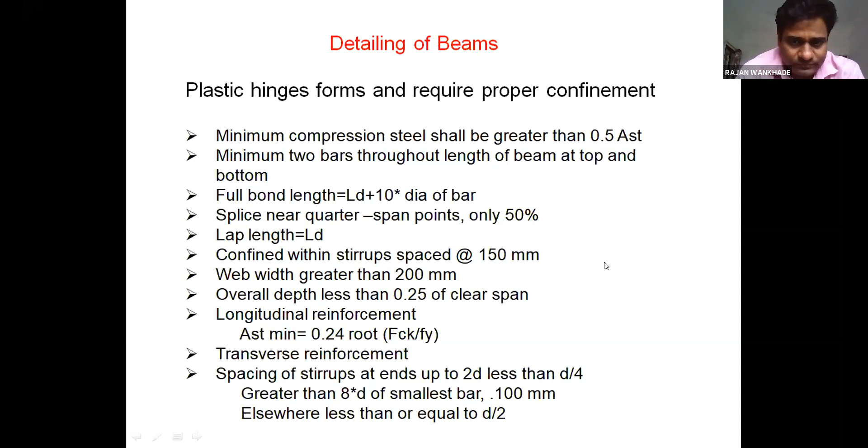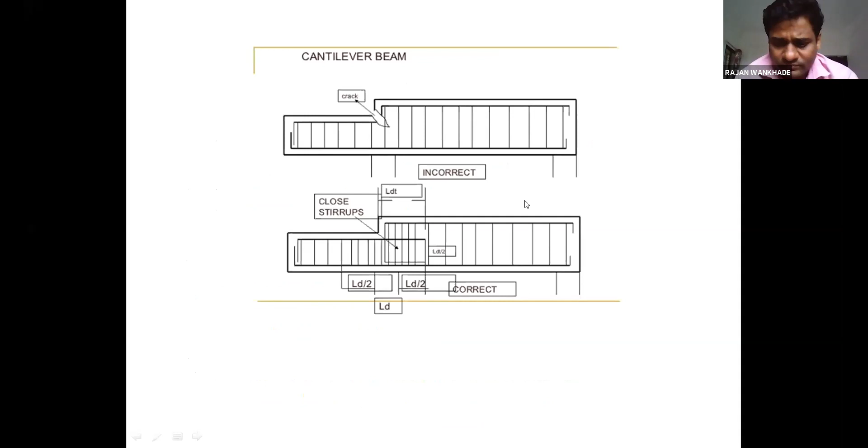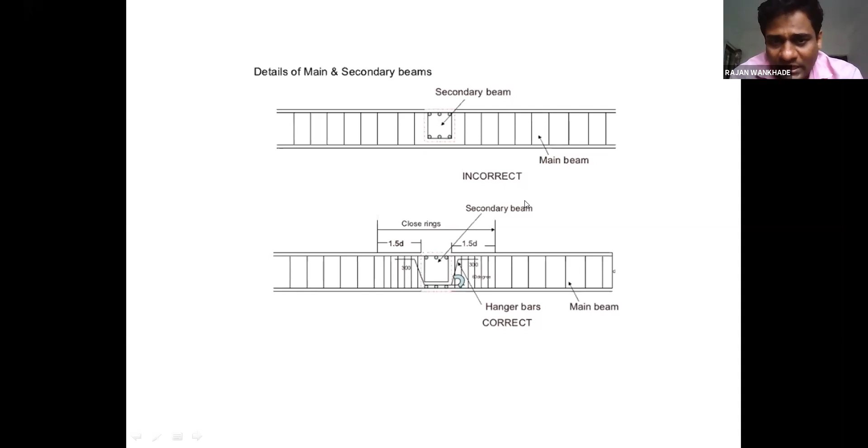General provisions for confinement at the junction, the change of geometry. When there is a grid beam, hanger bars shall be provided in the correct positions. For main and secondary beams, the depth of the secondary beam is always less than the main beam, that we know. But when providing secondary beams, cracking in the main beam shall be avoided by providing these hanger bars.

So this will avoid the crack in the main beam. These are some examples of proper, correct reinforcement detailing.

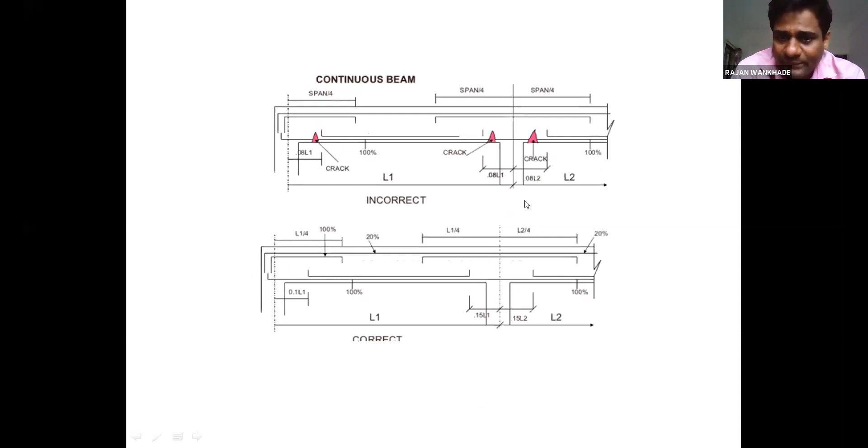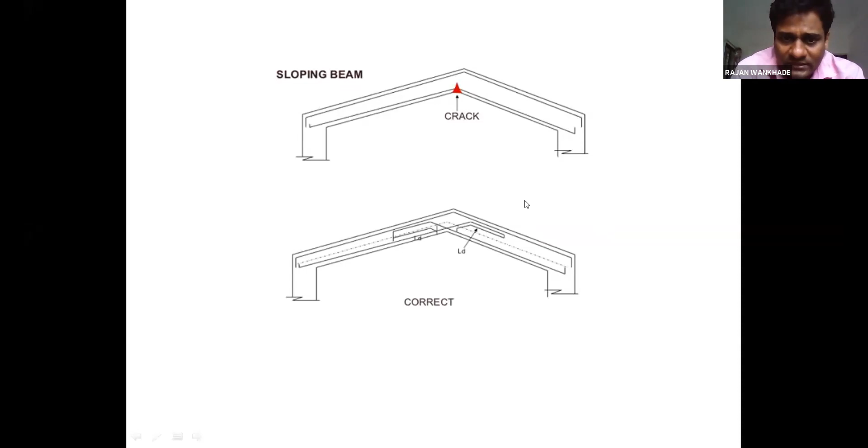How to avoid cracks at different sections by providing this reinforcement, with proper development length. For sloping beams, the reinforcement shall be provided from one side to another by means of this inclined development length.

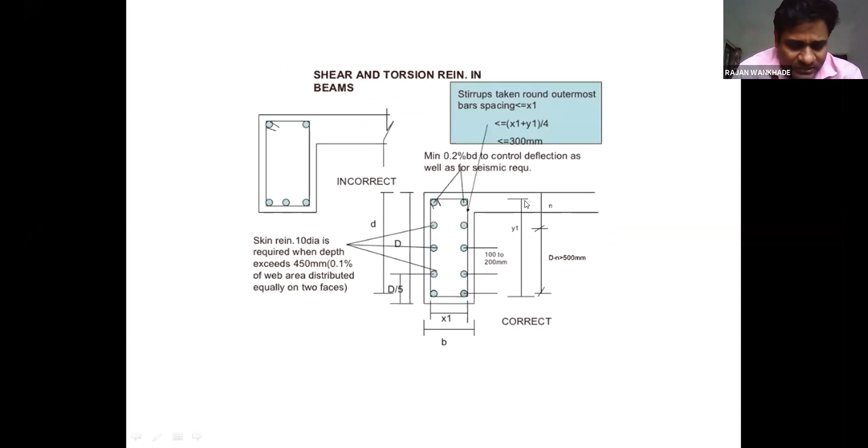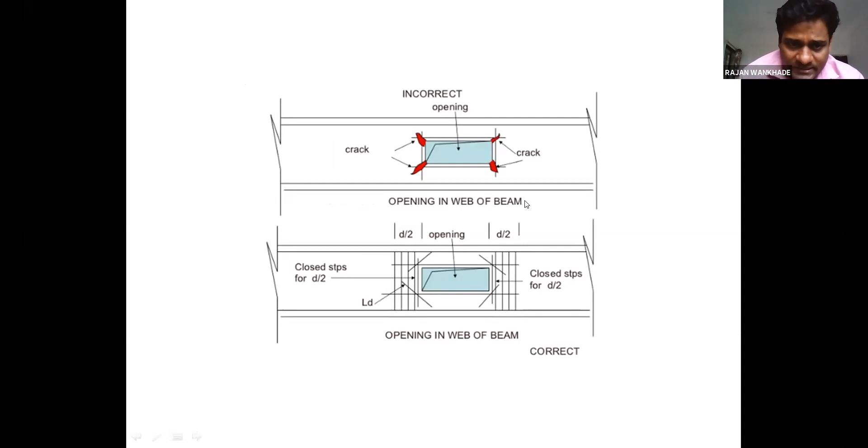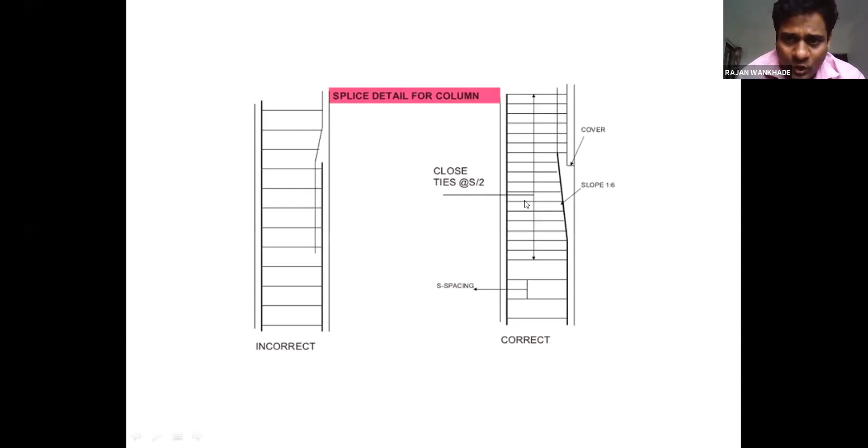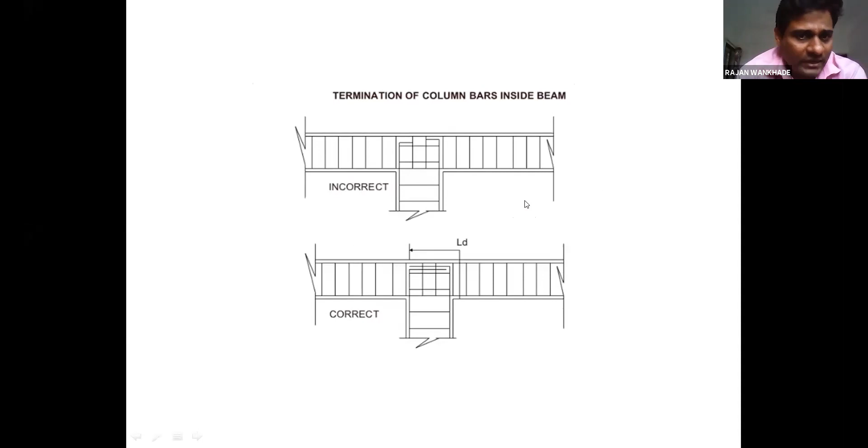Beam column junction as per IS 13920 confinement, and splice detail for the columns. How to terminate the bars in the columns and beams with proper development length, with the total provision for this beam column junction. The spacing of the lateral ties shall be less than or equal to 100 mm for the confinement, or the spacing of the lateral ties shall be less than or equal to S by 2.

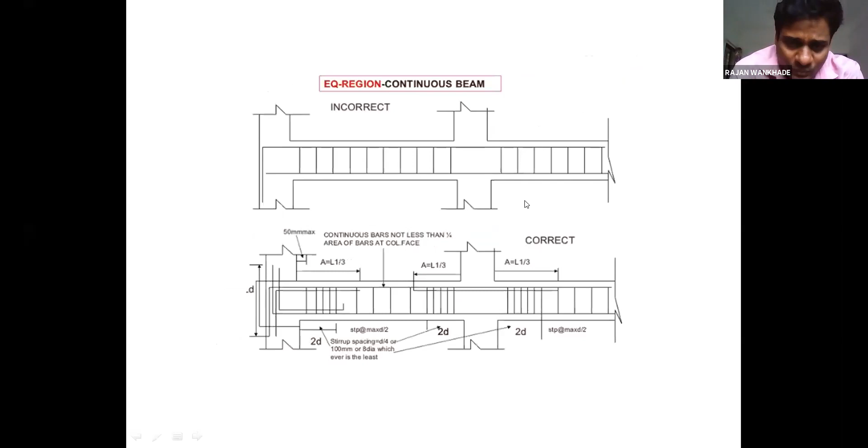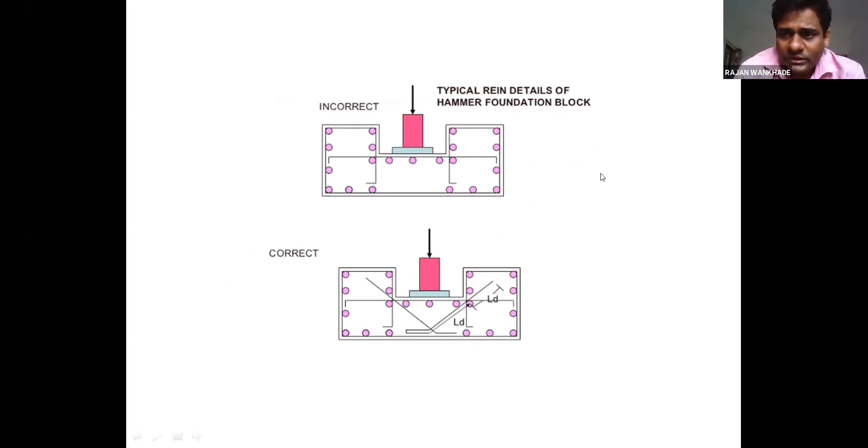These are the correct detailing given for the continuous beam with different supports, and the moment at the center and moment at the support. For putting, we know the specifications, for vibrational forces at the foundation or hammer type of foundation block. So these are some examples of the reinforcement detailing, how to avoid the cracks and how to provide this reinforcement.

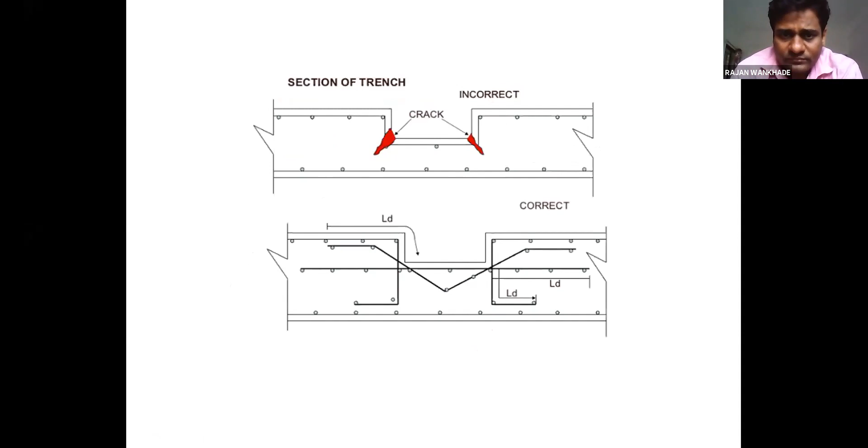Okay, so this was regarding some important provisions of the IS code. If you have any question, you can put it, then I would like to answer this question.